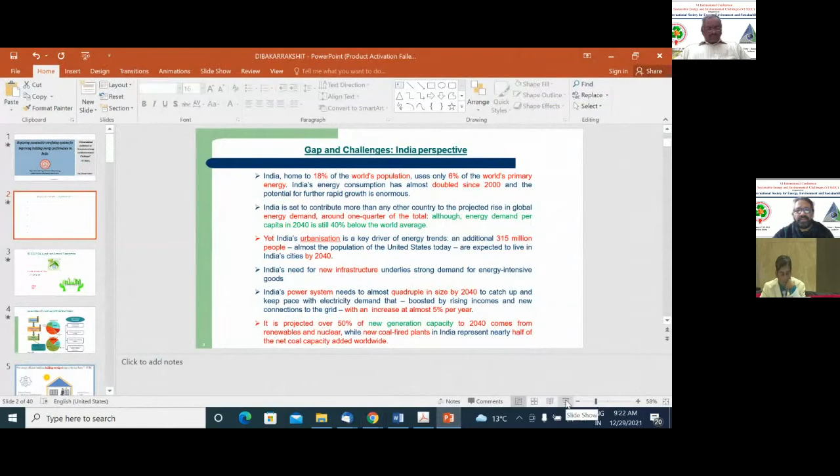Thank you, sir. So when we are speaking about India's contribution, it is said to contribute more than any other country to the projected rise in global energy demand if we are projecting it for 2040. But in terms of energy demand per capita, it is still 40% below the world's average. So you can see that there is a contrast.

And if we are speaking about how this energy consumption will be happening, the most important or the key driver in this is India's urbanization. You can see that there is a trend of people moving from the rural setup to urban areas, where we will be having more construction and more energy-intensive work taking place.

And when we are speaking about the way this urban population will be developing, by 2040 we will be having almost 300 million people living in the urban areas, which is equal to what the United States of America is having today. So definitely there is a need for new infrastructure underlying this huge energy-intensive requirement, this demand which we will be having.

India's power system will be quadrupling by 2040. I'm projecting it for, say, the next 20 years. And it can be seen that there is a huge requirement of new energy capacity, new generation capacity. And of course, renewables and nuclear will be taking an important part, but we can't eradicate the requirement of the new coal-fired plants, which will also be coming up.

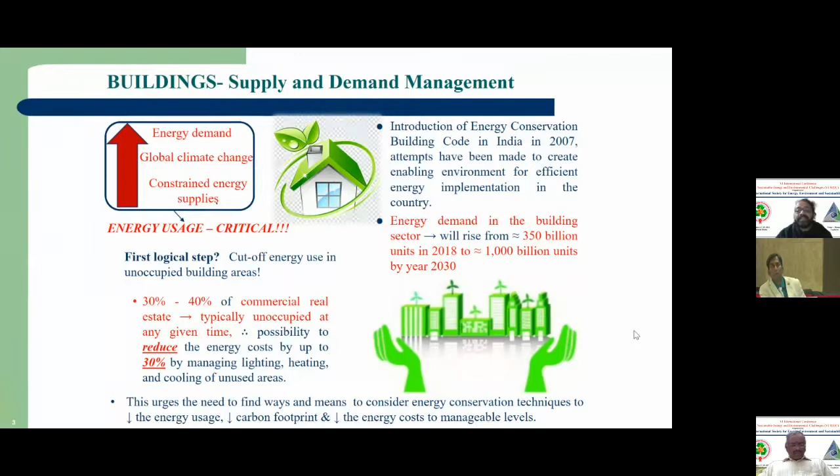So if we can have this type of demand side management, so that the energy can be judiciously utilized in those commercial buildings, then there will be a huge saving, or a huge evenness coming through the utilization of energy. And of course it will help us to reduce the carbon footprint, and it will make the energy requirement more practically used.

So now when we are speaking about energy, the highest form of energy which we generally speak about is electricity. When we are seeing the urbanization in India, the growth in the building sector which will be coming in the next 20 years, there is a huge requirement of energy, and especially this energy will be driven by the electricity requirement apart from any other forms of energy.

Now, we cool the building utilizing various active means, like the air conditioners we generally have, whether it is a centralized air conditioning system or a split or separate unit for each individual unit. But there are some passive features which we should promote and take into consideration, which have a huge impact on how we can save energy in these buildings.

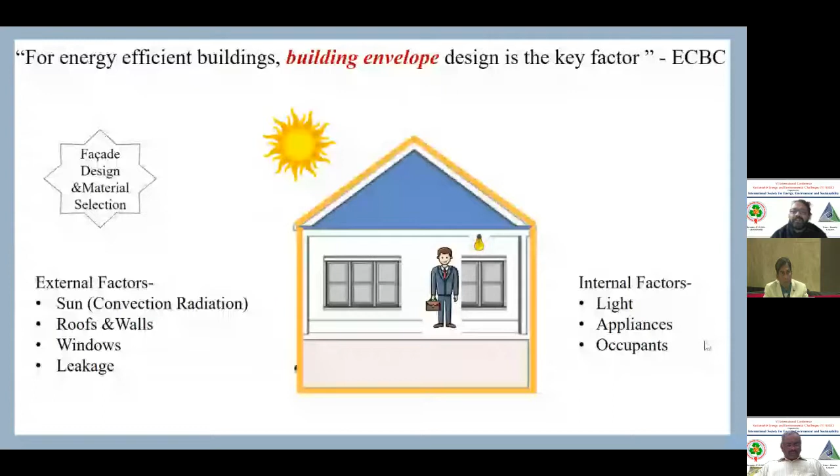Now, when we are speaking about the building facade, this slide pretty much summarizes what are the various portions through which the heat gets engrossed in that particular control volume. So maximum amount of heat gets engrossed through the roofing as well as through the walls. The facade is the main ingredient for increasing the heating or the temperature of that particular building through this roof and the wall. So if some way or the other we can optimize this design, we are directly having an impact on the electricity consumption of that particular control volume.

Now, here I will go a bit off, like I'm speaking about thermal comfort, but of course, when we are speaking about the indoor environmental quality, it is not only the thermal comfort, it is also the visual comfort, the type of air which we are breathing inside. This actually will be helping us to maintain less health risk, and at the same time it will be increasing our productivity. So if we are not maintaining it, of course it can be creating some sort of imbalance in the productivity of that particular area.

Now, why I'm speaking about this building facade in more detail can be understood from our vernacular structures. If we are going to our ancient time, we can see that there are various structures which are having a huge mass. This mass is actually the thermal inertia which is being created by the building facade or the roofs and the walls. But that time we were having the luxury to expand ourselves beyond any limit because space was not the concern. But when we are speaking about urbanization today, we are having the biggest constraint as the space.

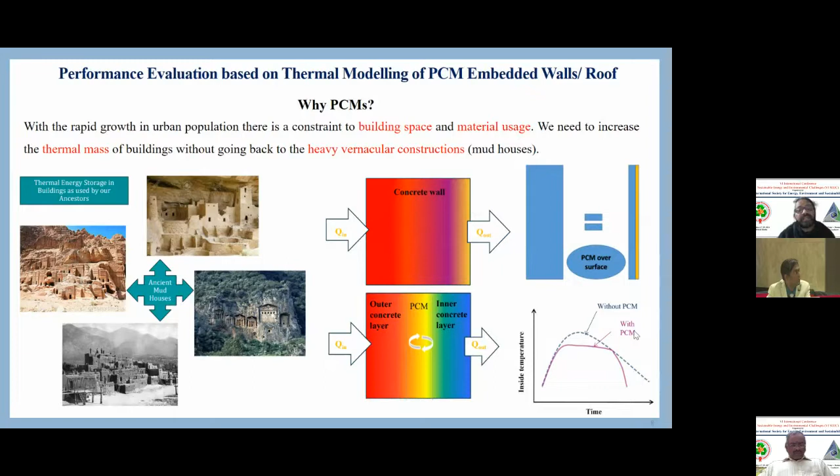Basically, phase change material has a very high energy density. Energy per unit volume of that particular material is very high, and at the same time it can have this storage of energy more or less at an isothermal condition, unlike that of the sensible heat storage capacity of any medium, which is not taking place in constant temperature conditions. So these are the beauty of utilizing this phase change material in the building envelopes.

And just to make you more aware of it, if you are going to some ancient buildings, say Humayun tomb or some of the forts, you will be seeing when you are going in peak summer, when outside temperature is suppose 40 degrees centigrade, at least you will be having 7 to 8 degrees centigrade lesser temperature in those buildings. And when you are going in peak winter, if outside temperature is say 10 or 12 degrees centigrade, at least you will be having 20 degrees centigrade inside those buildings. This is by virtue of the thermal inertia which that particular building system is having.

Now, as I was telling, people are moving from villages, they require houses which will be much more comfortable so that their productivity increases. And at the same time, if we are seeing holistically, the energy gets more or less evenly distributed as and when it is required. So that is the whole area for which we are trying to understand how this phase change material can help us in evaluating the performance of a particular building envelope which comprises the walls and the roofs. So we have taken the example of Pradhan Mantri Awas Yojana.

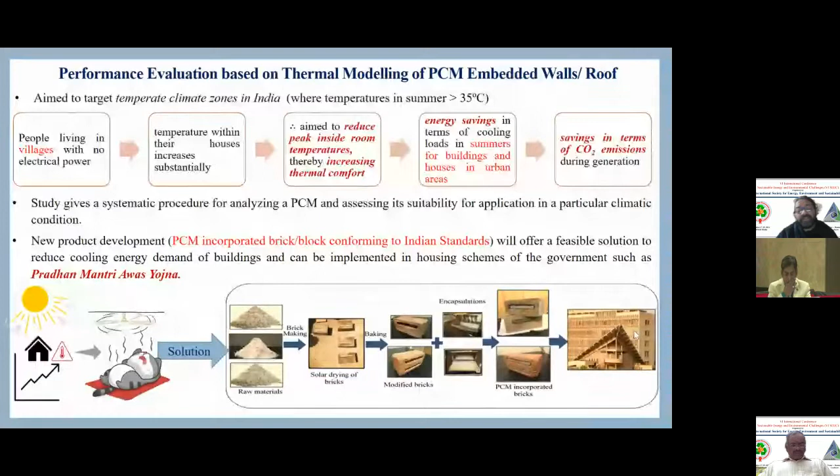Here I will speak about the type of phase change material which can be utilized, which can be encapsulated in those building blocks according to the climatic conditions of India. In India, basically, we have 6 climatic zones, out of which 5 are quite prominent. Taking the required phase change material according to the melting point, which will fit that particular climatic zone, is a very humongous task which you should always take care of, so that you don't choose the wrong phase change material for a particular situation.

And regarding the type of arrangement which we have taken in the bricks, this experiment is being conducted at Delhi. So we have taken the composite climatic zone of Delhi, and we have picked those phase change materials which have the melting point in accordance with the mean temperature of Delhi over a period of 365 days. Of course, we have designed it for summer conditions, because summers in Delhi become quite unbearable. So we have done 3 arrangements.

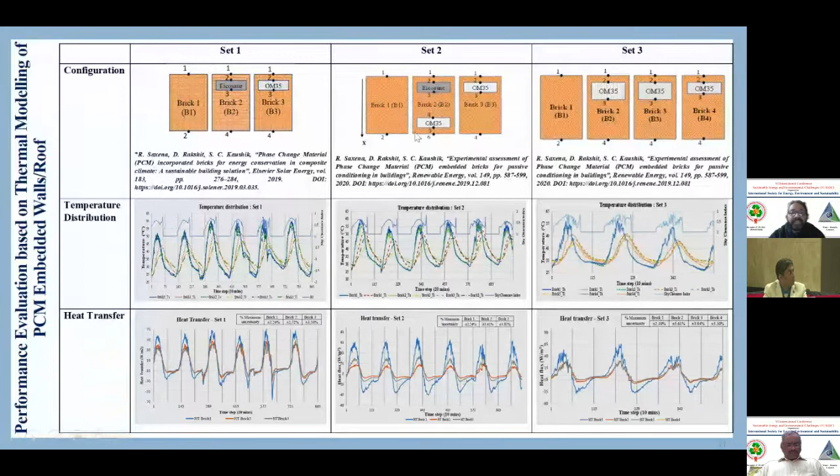Here you can see that one arrangement is with the brick placed inside the cassetted phase change material, another one has bricks with 2 different arrangements of cassetted material, and the third one was again the bricks with the cassetted material. And in those containers or cassettes, we have some sort of arrangement to increase the thermal diffusivity of that particular brick. Like we have introduced some fins or some sort of irregularities in those boxes, so that we can actually have more thermal diffusion through bricks.

So 3 different arrangements we studied, and then we tried to conclude how much temperature reduction we are finding inside the room in comparison to outside. The experiments were conducted in the month of May, and we found that the inside temperature got reduced by about 7 degrees centigrade for the best configuration, and there was a heat gain reduction of around 8 to 12%. And this actually helped us to understand how much energy can be saved when we have this type of facade, this type of passive features introduced inside the building.

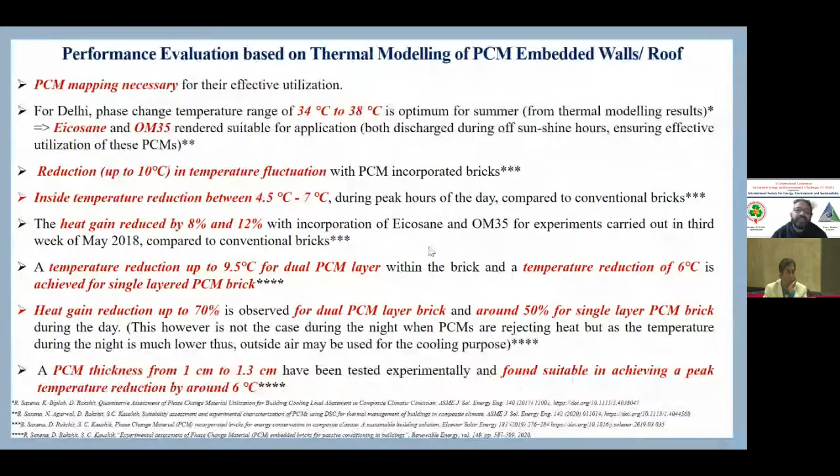Of course, we will not get in one stroke the 24 degrees centigrade thermal comfort temperature which we generally have as the norms of ASHRAE, but at least there will be some reduction in the temperature, which will not push you to that much electricity consumption where you have to cool the air from an outside temperature of 40 degrees to 25 degrees centigrade, maybe from say 35 degrees centigrade to 25-27 degrees centigrade. So there is a delta of energy savings which you can have by introducing this type of passive features in the building.

The next one is regarding a thermal retrofit. Again, with Pradhan Mantri Awas Yojana, we did generally.

Dr. Dibakar, yes, this is Himanshu. May I request you if you can maybe conclude in the next 2-3 minutes? Is it possible? Sure, I will do that. Thank you. Thank you.

So basically this building retrofit consists of the insulation as well as the phase change material utilized in the building walls. What we have seen generally when speaking about this type of retrofitting is that the location of the retrofit is known, or the thickness through which this heat transfer will take place is known. But a study making both the location and the thickness of this retrofit dynamic has not been done. So again, keeping in mind Pradhan Mantri Awas Yojana, we have done this type of retrofitting by varying the thickness of the retrofit, the insulation as well as the PCM, and at the same time the location.

For example, if you are doing this type of retrofit in Jaipur, it will be different from what we will have in Kargil or Siachen Glacier, because the temperatures or the climatic zones are different. So depending on that variable scenario, how we can do the retrofit was studied in this study, which we have done utilizing a genetic algorithm. I will not go into details of it.

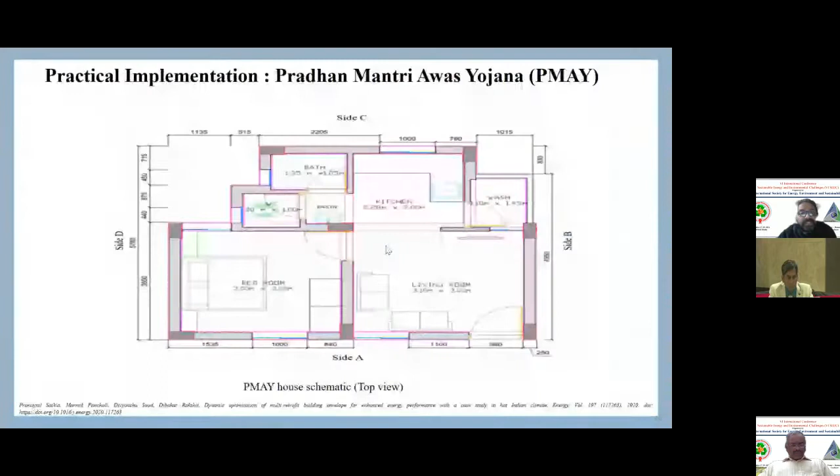I will just go to the final blueprint of Pradhan Mantri Awas Yojana. So you can see that the structural and orientation optimization through this thermal retrofitting, utilizing both the phase change material and the insulation in that particular control volume, can actually help us reduce the heat gain in that particular building to a considerable amount. And the electricity savings we can have per day is around 9 kilowatt hours.

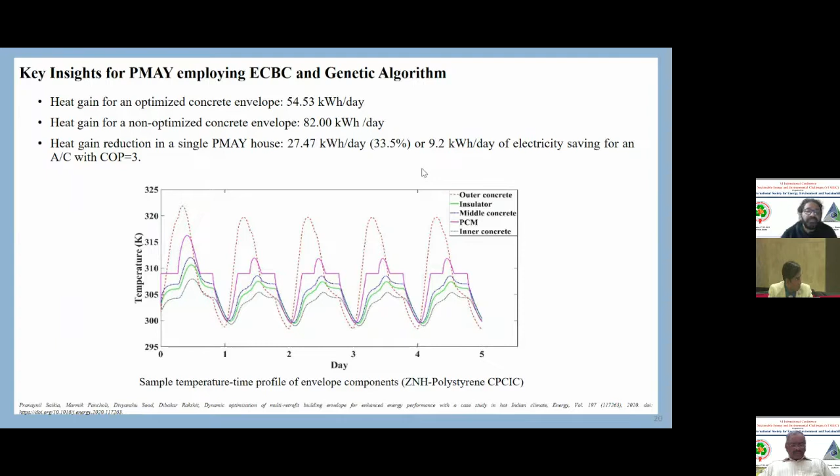So if it can be propagated in mass utilization through Pradhan Mantri Awas Yojana, we can save a huge amount of energy. So I think with this, I will be ending my talk, and if there are any questions, I will be happy to take them. Thank you.

Thank you very much, Dr. Dibakar, for an excellent talk. This is a very relevant topic for a country like India, where, as you rightly pointed out, a lot of the portions require a huge cooling load during the summers. As per the format, we will collect all the questions and take them together during the panel discussion round. Once again, I extend thanks to you.

Thank you. Now I request Professor Reddy. Dear sir, you may kindly share your screen. Earlier there were some technical difficulties. Now you may please go ahead and share, and we request you to kindly give your talk. Can you see my slides? We can hear you, sir, and I think we are seeing you. You have to click that button on the bottom. Yeah, now we can see it. See the slides? Yes, sir. We can see the first slide. If you can go in full slide mode. Thank you, sir. Okay, perfect. Thank you, sir.

Good morning to everyone, and thanks to Himanshu for giving me this opportunity. I'll give you a quick summary of various solar technologies for sustainability and carbon neutrality. By solar energy technologies I mean indigenously developed solar technologies for sustainability. How do we get sustainability through these technologies, how do we achieve carbon neutrality with them, and how technology development plays a major role in this.

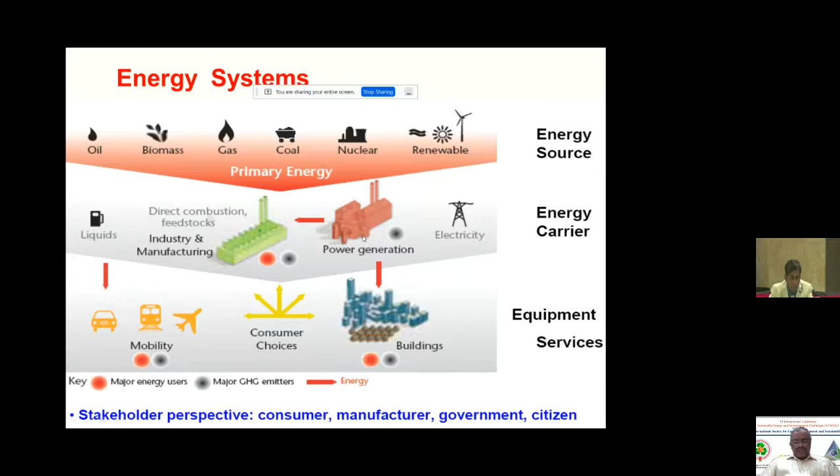I will quickly mention what sustainability is. Energy sustainability is important. We feel that we deserve luxurious systems, but obviously the system technology is very important, and the fuel used for these technologies is also important. We want good technologies, and the best technologies are luxury technologies which are imported, and we use them because we can afford it. Therefore we use fuel which is again imported. So importing the technology, importing the fuel, and polluting the Indian environment. That is a major problem as far as energy sustainability is concerned. So therefore it is very important.

Oil is one of the major energy sources in India for automobiles. In case there is some problem with oil, which we import from the Middle East and other places, we land up in an environment where there is no fuel. So energy sustainability is very important, because the Earth is surrounded by its atmosphere, and we are talking about global climate change. We are literally polluting by burning fossil fuels, and because of that, you have seen recent weather changes and so on.

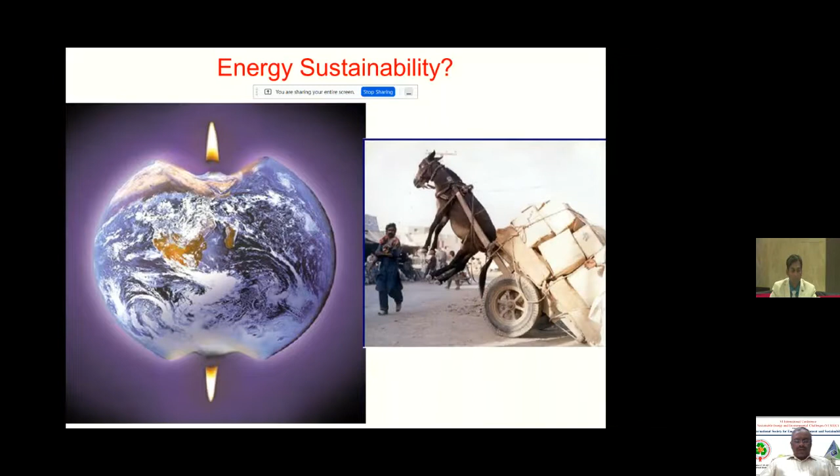So the Earth's atmosphere is overloaded with pollutants, and in turn it is getting imbalanced. Any overloaded system will be imbalanced this way. Therefore, energy sources need to be utilized, and if we don't develop our own technology, these resources will go extinct after some time.

So these are limited and they are stored. So if you try to take the resources, they will become extinct after some time. So therefore, it is very important to come up with a technology which is indigenous technology, so that the technology can keep these resources for the future generation, and we can take our own share. So therefore, technology plays a major role, especially in attaining energy sustainability.

So therefore, there's one earth we have to take care of, and energy sustainability is very important, and this includes various aspects of energy supply parameters, and energy efficiency, proper mix of energy sources, and renewable energy utilization are the major solutions which make the energy scenario sustainable.

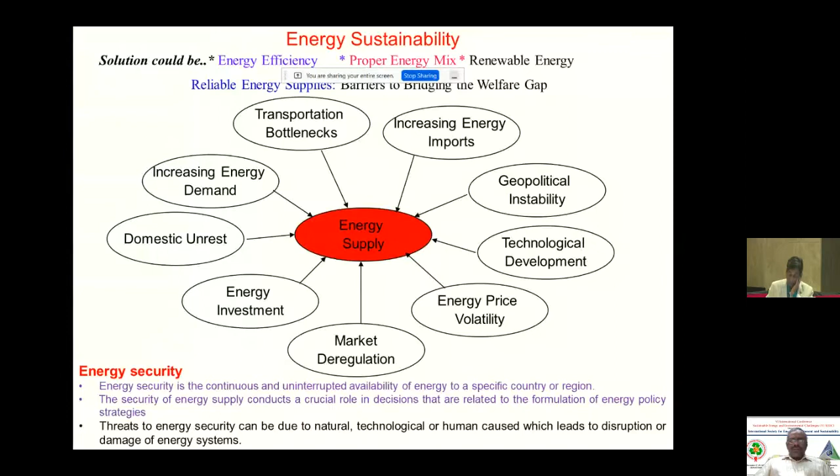So therefore, energy security is very important, and energy security means the continuous and uninterrupted availability of energy to a specific country or region. The security of energy supply plays a crucial role in decisions related to the formulation of energy policies and strategies. So therefore, any threat to energy security can be due to natural, technological, or human causes, which lead to disruption and damage of environment and energy systems, which is why I have mentioned that if we don't have a proper technology, we have a problem.

If you look at the energy services and sources from the day of industrialization, you know that industrialization started in the 1870s. Since then the transformation of energy has mainly been exploitation of fossil fuels. And if you look at fossil fuel exploitation, the hydrogen content in fuel plays a major role. As we increase the hydrogen content, it becomes more efficient, more sustainable, cleaner fuels. So gasoline has more hydrogen content than coal.

So therefore, eventually, if you have only hydrogen, that's what we are talking about, green hydrogen nowadays. Producing hydrogen from renewable energy sources like solar, wind, and other nuclear energy sources can give a solution for future energy scenarios. So there are several challenges to evolving resilient energy systems, key issues and challenges. I'm not going to read them here, I'm giving you the glimpses because we have very limited time.

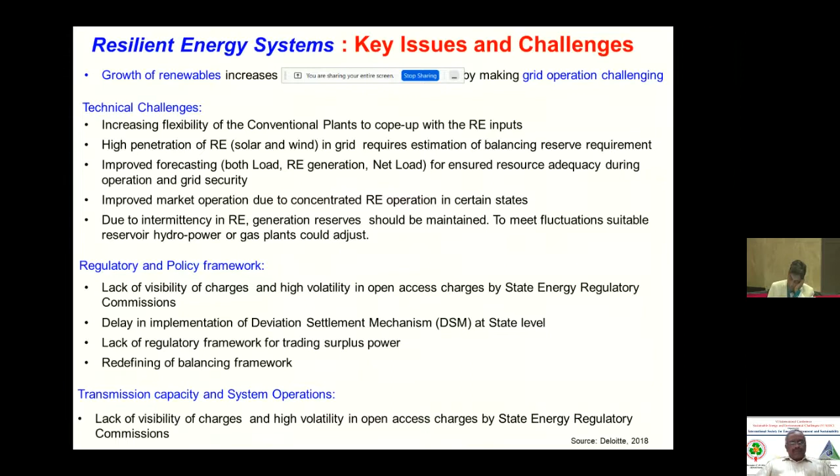There are several factors which play a role in resilient energy systems, like technical challenges, regulatory and policy frameworks, transmission capacity, and system operations of the energy systems. Towards a resilient energy system, it should be flexible, and demand side management is very important. As Dr. Divakar just mentioned, mainly cooling and heating loads in buildings and so on. So it's important to have a resilient energy system which can cater to these requirements.

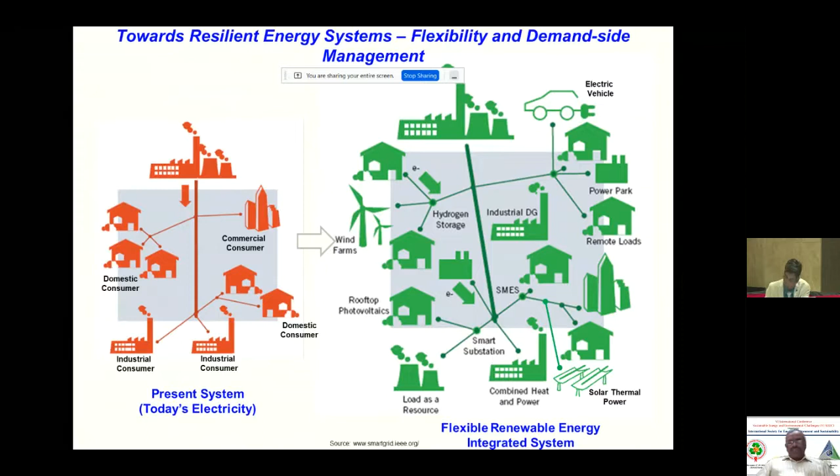If you look at the present system, it is this, but we may have to go like this, toward decentralized, flexible, renewable energy integrated systems, which may result in more sustainable and carbon neutral systems. As part of sustainability and carbon neutrality, there are various options where different types of intervention need to be emphasized on the demand side as well as the distribution side. I have listed here several system operation services from variable renewable energies, load management and flexible generation, transmission. Storage is another important factor, and a lot of research is being done on both thermal energy storage and electrical energy storage.

As part of that sustainability, I will quickly give you some of our technological interventions in renewable energy systems, mainly for sustainability and carbon neutrality. So we have developed

Sir, I think we have lost him. Hello. Dr. Tyagi? Hello. Am I audible? Yes, sir. This is Himanshu. Yeah, you are audible. We'll wait for a minute. I think earlier also there was some connectivity issue. He may join back. Sir, please try to keep your camera off, because as I already mentioned, even if there is a small connectivity issue, the speaker is being picked up.

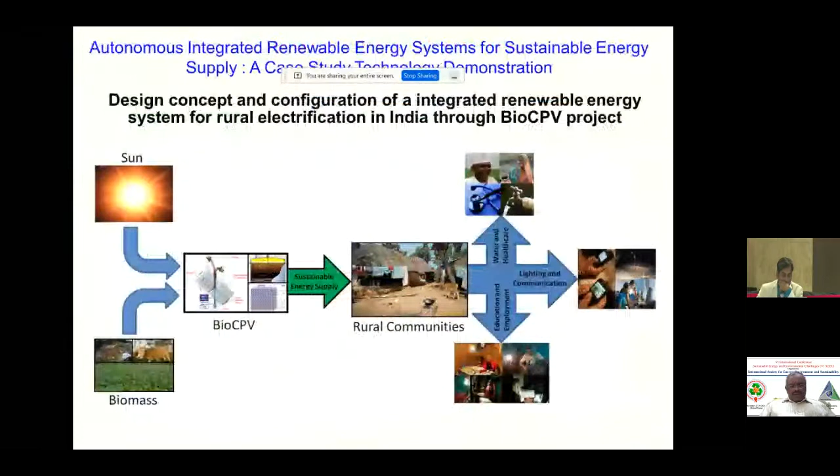Hello. Okay, can you hear me now? Oh, okay. Sorry. So I'll cut it now. Oh, sorry, I think there's some instability. Can you see now? We can hear you, and your video is working. You may have to click the share screen button on the bottom, because we are not able to see. Yeah, something is coming. Yes. So, sir, you may have to go back two or three slides, because we lost you about two minutes back. One more. Yeah, this one. Maybe next one also. Yeah, from here. Please go ahead. I'm sorry for the loss.

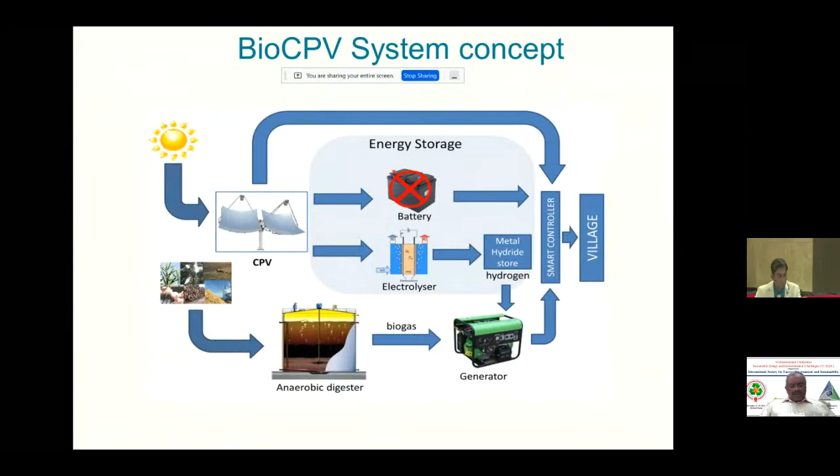So this BioCPV we installed in West Bengal in Shantiniketan, Rabindranath Tagore's place, and it is an integrated system with biomass and solar. This is a comprehensive system which takes care of not only electricity but also cooking gas and water. This is the system configuration; I'm not going in detail. Based on this system, we have built this and supplied it to this village. This village doesn't have any electricity. It's a remote village of about 60 houses, which are like huts. We have given both power and biogas, cooking gas plus water with this.

Can you hear me? Yes. Hello? Yes, yes.

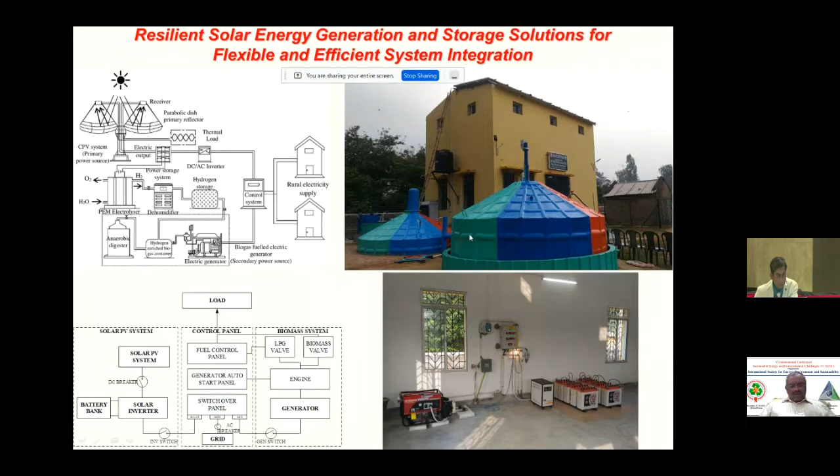Okay, thank you. So this system is integrated with biogas and solar, and with the battery, so that it's a 24-hour supply. Whenever the solar is there, the solar energy is used for supplying the power. When there is no solar, based on load management it switches to the biogas. When excess energy is produced, it is stored. Mainly during night time, it comes from the battery. So this is a comprehensive schematic of this particular system.

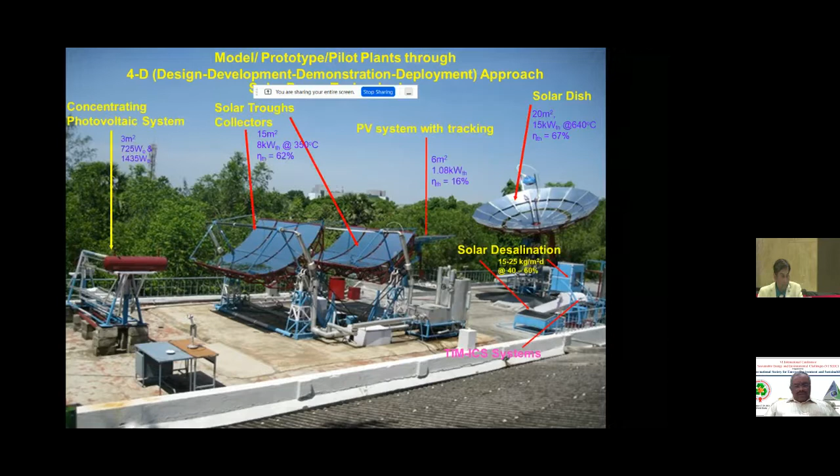As I mentioned, as part of sustainability and carbon neutrality, indigenous technology development plays an important role. Our approach is a 4D approach: design, development, demonstration, and deployment. Through 4E as a tool: energy, exergy, environment, and economic analysis. And through 4Ts, test tube to tabletop to technology development. Based on this, we have developed several technologies; I have listed 20 here. This is our lab at IIT Madras, with concentrating solar power technologies, mainly solar dish, trough and so on.

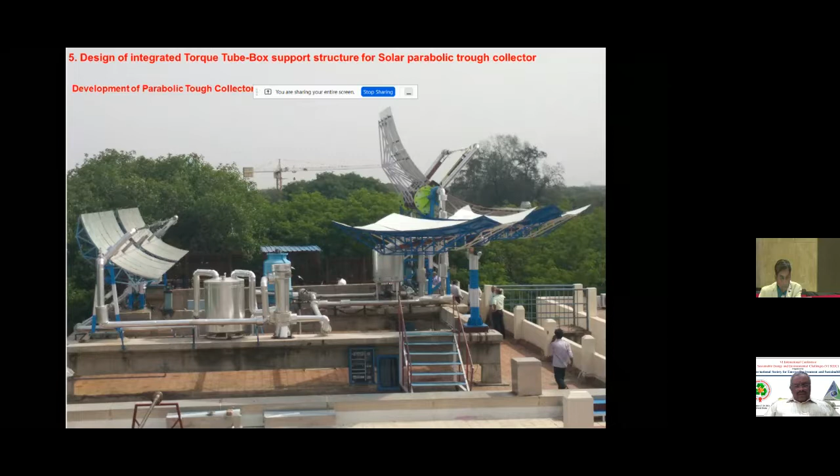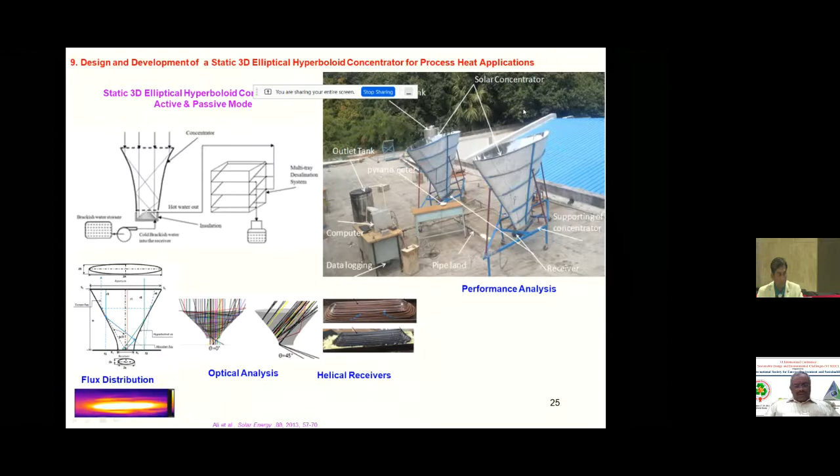Apart from that, there is a non-tracking system mainly for water desalination. This is a concentrating hyperboloid and elliptical structure which can cater to the needs of water generation, and it is non-tracking, because passive systems are an important thing.

So then, based on this, this is the water. As I mentioned, food, water, and energy are very important. So this is one such system, a multi-tray solar desalination system, the most efficient, with waste heat recovery and using latent heat. And I have given you that.

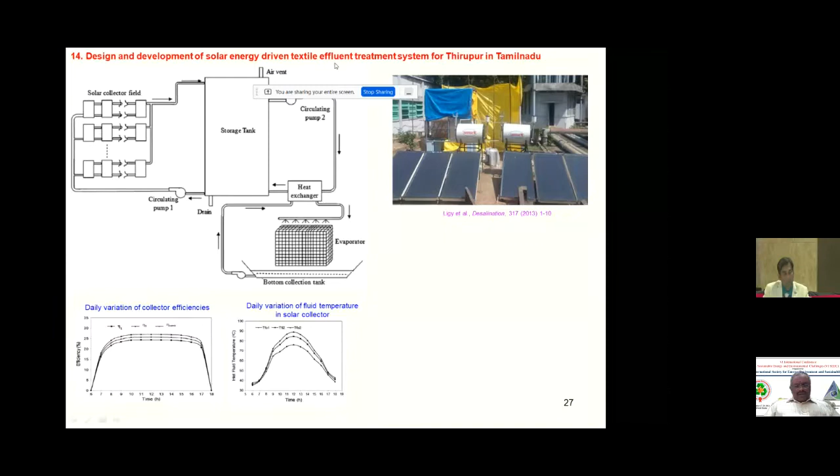And not only water treatment, but also wastewater treatment is important. You know that most of our Indian water bodies are polluted, and treating this water before sending it to the water bodies is important. So this is one system which takes care of the treatment of textile effluent, located in Thirupur in Tamil Nadu. This area is actually a textile hub for entire Asia, but now because of the stringent environmental norms, most of these textile industries are in trouble. So they wanted a solution which can treat the water.

Another important thing is what we have told you, net zero energy and carbon neutrality. We also have Swachh Bharat, which is important. Toilets are very important nowadays. So we have developed a solar zero waste discharge toilet. That means there is no liquid and no solid discharge, and we used both thermal and photovoltaic energy for driving the system. It's completely hermetically sealed, and the PV power is used to run the motors.

And we have a desalination system which treats the wastewater, and then there's a dryer. The solid material is dried and made into fertilizer or powder, which can be reused. And the treated water can also be reused. We installed this in one of our students' hostels in IIT Madras, Krishna hostel.

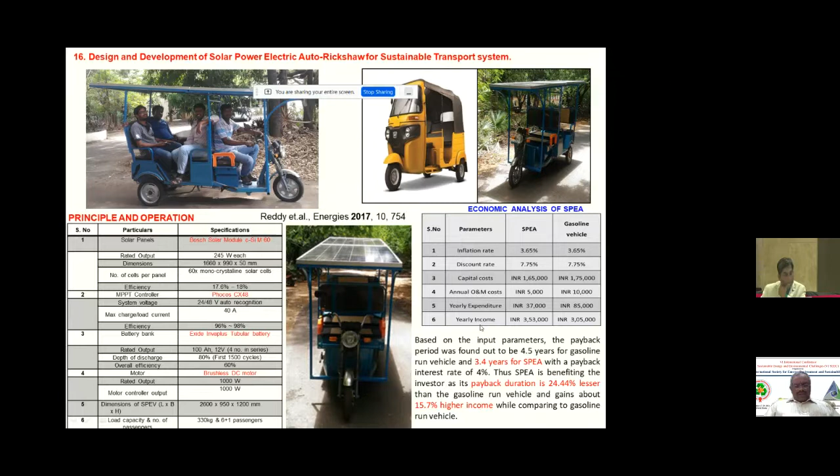Mobility is another important area to get carbon neutrality. As I showed in the first slide, the sustainability as far as the oil industries, like automobiles, are concerned. So one of my students developed this solar auto, and its cost competitiveness has also been studied, and it is proved that it is better from the emission as well as the cost point of view. These details are here, and it's also published. Those who are interested can look into it.

With this, I will conclude that the future energy system has to be resilient, more sustainable, and more carbon neutral. So generation and storage solutions for flexible and efficient system integration are very important. A future electrical energy system may consist of these components, which include distributed systems, electric vehicles, demand side management, advanced integration of infrastructure, data storage centers, and of course advanced grid and industrialized centralized generation. So it's a comprehensive thing.

Flexible, efficient renewable electricity generation and storage solutions are very important for system integration and sustainable energy supply. A new concept of integrated renewable energy system has been proposed for low cost and uninterrupted supply of electricity mainly in rural areas, which I mentioned earlier. Only with this will we be able to achieve carbon neutrality.

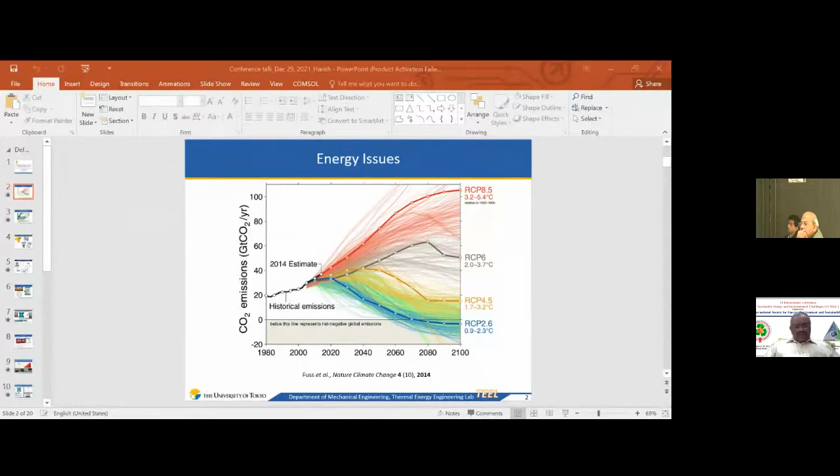Yeah, this thing never happens, because if you have shared your screen, then whatever you see, we also see over here usually. Can you see my slide? I'm just swapping around the slides. Can you see the change? I'm sharing the screen, right? No, this is a static image. We are getting the slide titled Energy Issues. On the bottom it is written slide 2. So you don't see any changes so far. You may want to minimize and open some other file or show desktop just for checking. Then please share your entire screen and then open your PPT.

Sorry, Dr. Dibakar, what are you saying? So what we are saying is please try to share your entire screen and then go to your PPT rather than sharing just your PPT tab. Okay. Yeah, now I think we can clearly see your complete screen. Perfect, now we can see the full screen, slide 3. Thanks, Dr. Dibakar. Sorry for the glitches. Please go ahead. So I didn't expect this glitch to happen.

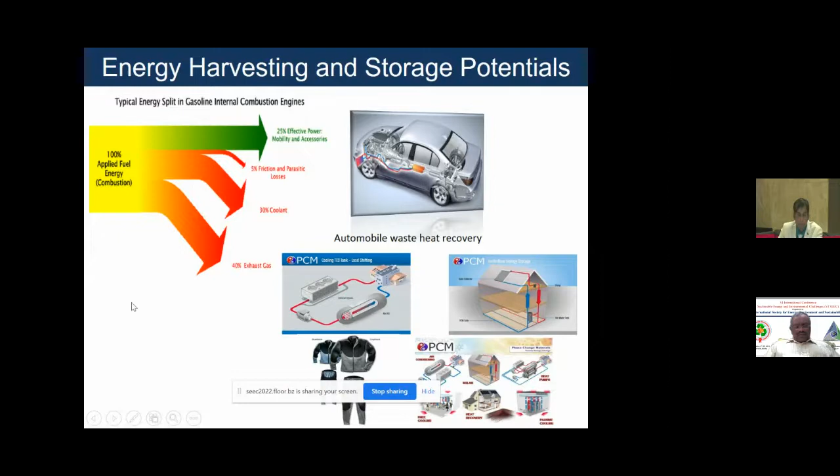So with exhaust gases, we are trying to see how smart we can be, what improvement we can have. One such technology is thermoelectric devices. Again, thermoelectric devices are a very old technology. If somebody asks a mechanical engineer, experimentalist, or electrical engineer how a thermocouple works, that's how thermoelectric devices work. A lot has been done. It was a hot topic for the last 15, 20 years, which will probably go on for another 10 years, in my opinion.

There are a lot of people trying to improve the thermoelectric materials as such. A huge amount of work and simulations have been done, and how this is going to affect things from the device perspective is the question I'm going to talk about. In fact, I'm taking a very particular subject, like what Dr. Dibakar talked about: building energy. Huge urbanization is happening, and people are migrating from rural to urban society. They want smart solutions, not hard solutions.

People are lazy. So we are trying to have IoT sensors which deal with the handling, and then you can get this data and do the processing using artificial intelligence. Data science technologies are available now, and we are trying to make things as simple as possible. These kinds of IoT sensors need self-powered devices.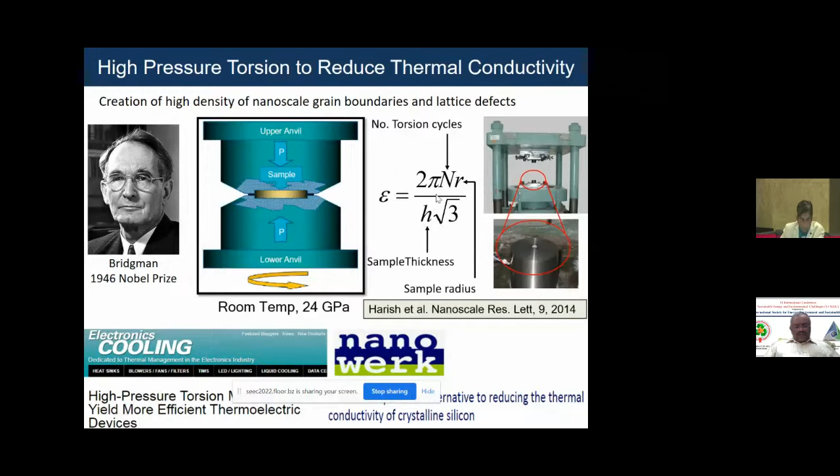But from the device perspective, you can have a very nice material which doesn't work. So the important perspective, from commercialization and from the device perspective, is to have a highly efficient device. So we thought: the hot side is beyond our control, and the thermoelectric materials, even commercially existing ones, are beyond our control, but we can play around with the ambient situation and make the cold side colder to make the device as efficient as possible.

So what is the trick? It's a very simple trick. Natural convection is definitely existing. Are we going to have condensation, dropwise condensation, or boiling? For sensors, where you don't have space to include anything, you have space limitations and no structural integrity, so you have to really cope with the limitations and rely on what is happening. So evaporation is the best methodology.

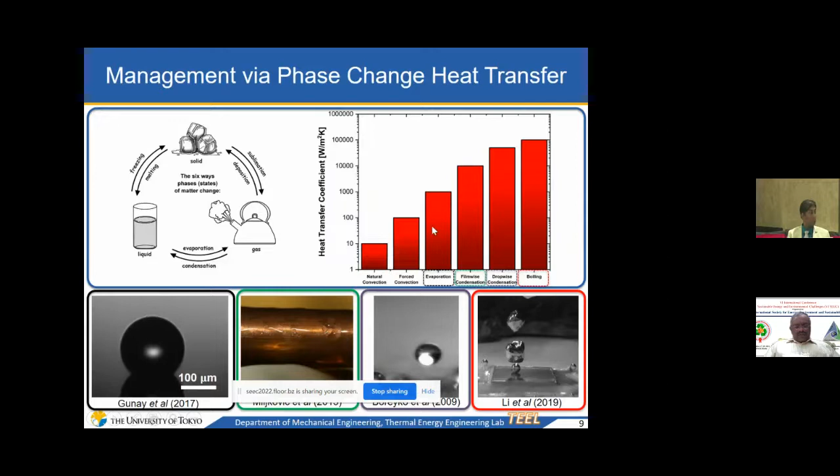So how are we going to evaporate water? Are you going to deposit water? No. We worked with metal organic frameworks, which are not a commercial material. It's a chemical synthesis process, with very high porosity and very high surface area, which can absorb water depending on the relative humidity condition. So we made use of that and tried different metal organic frameworks, one chromium based, the others aluminum and zirconium based.

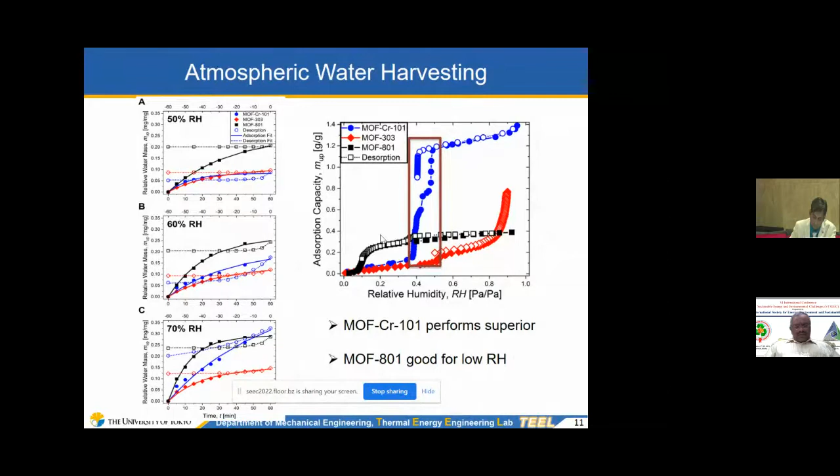For these cooling purposes, in the range of 40% to 60% humidity, you can see a material which can absorb water from the atmosphere at its own weight. So that was a great sign. So how are we going to do this? We just coat the metal organic framework on the device and see what happens. We tried different materials. One works for proper humidity ranges, one works for arid situations, and one works massively in high humidity situations.

So this is a very simple example. You have a hot side which you don't change and don't control, and a thermoelectric device which you don't control, and you only have the cold side of the device, which you properly control, and you just coat it with a porous copper substrate, because porous copper surfaces can also support it by capillary imbibition. We did a lot of experiments, a lot of trial and error with different MOFs. I'm not going to go into that in detail.

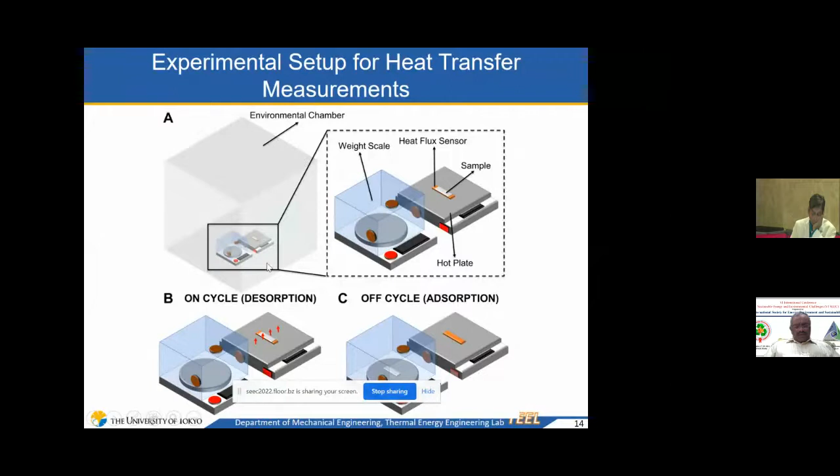Even the experimental procedures. Most of the experiments were done in the environmental chamber, which is a controlled atmosphere, but real-time experiments were also done. I can show you the results a bit. The idea is this: we allow the water to be absorbed inside the environmental chamber, then provide a heat pulse and see how it behaves, how the water is getting exhausted and what efficient cooling capacity you can deliver using the coating.

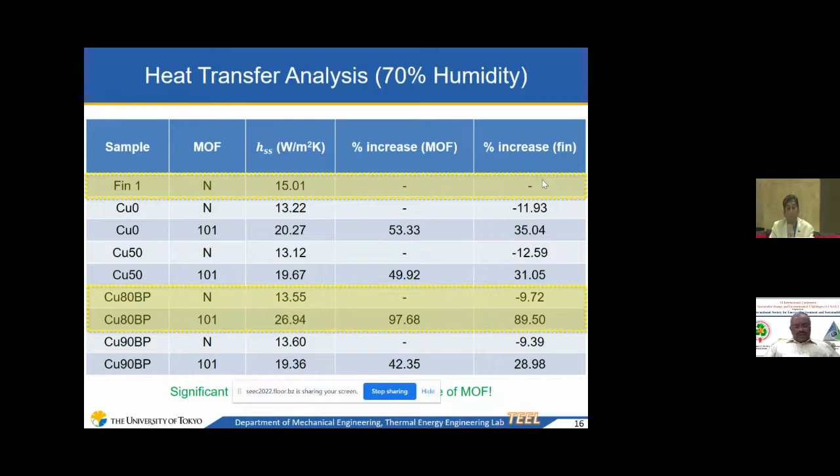What we learned is that this is far better than what a traditional PCM or traditional conventional devices can do. Just by having a coating, this is 80% porous copper, if you look at this slide, it can perform almost 90% better than a conventional heatsink available in a commercial thermoelectric device. So just a MOF coating gives 2 times better heat transfer performance, and this became another very interesting strategy. I'm hiding certain results because we have filed a patent about this.

So we used a chromium based material. As I said, MOF 303 is aluminum based and 801 is zirconium based. If you look at the mathematical analysis we did, coupled with the experiments, especially for MOF 303 and 801, a significant amount of heat transfer is happening because of radiation at room temperature, which is quite weird to understand.

And when we did the emissivity analysis, we learned that this is 100% emissive. In principle, MOF 303 and MOF 801 are white bodies, but they behave like a perfect black body. So this is a very suitable material for radiative cooling, and the preliminary experiments we did show that radiative cooling, like what Dr.

Dibakar said, it can actually cool just by having a coating. You can cool the substrate from the infrared radiation by 4 degrees Celsius in the daytime, up to 8 to 9 degrees Celsius at the night time. So that was a major experimental work.

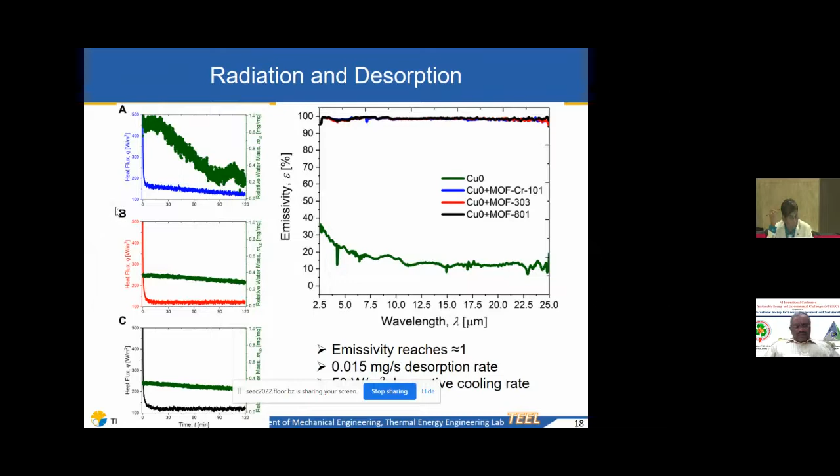I'm not showing that slide for particular reasons because we have filed a patent about this, but this is the emissivity data. So in principle, how these kinds of materials work from the thermoelectric device perspective: you can actually see a 6 times increase in the power output, and compared to the conventional existing heat sinks, you have 90% better performance.

I also tend to point out this experiment was done using a bismuth telluride device. This is a very conventional existing commercial device. So with new, better commercial thermoelectric devices coming up, and we are still progressing towards better technology, better design of MOFs, there is a huge scope: using TEG with MOF coatings will be a very nice solution for self-powered devices.

So I summarized this because I was only given 8 to 10 minutes. So MOF coated thermal fins were developed. It's a new technology, very scalable, commercially viable, and lightweight compared to phase change materials. So please think beyond phase change materials. We have very nice performance improvement, and I will be very happy to answer questions about this, because I haven't shared a lot of technical details. Okay.

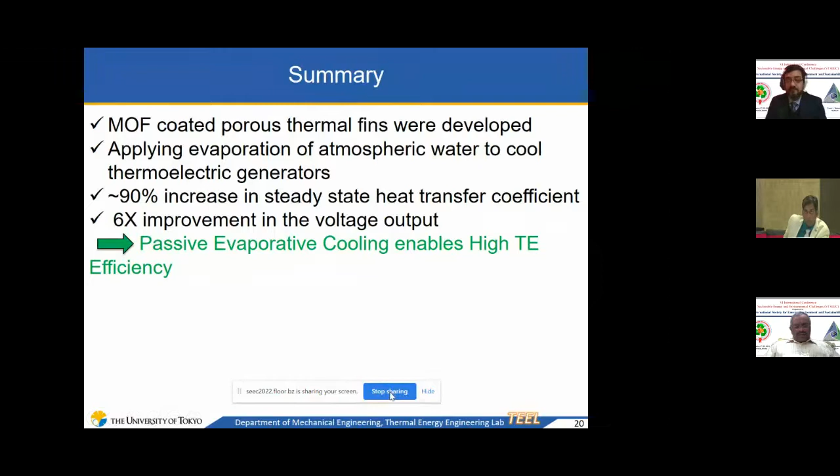Thank you very much, Dr. Harish, for the excellent talk. This is going to become very important because electronic devices are producing heat fluxes which are increasing every 2 years. So for nice dissipation of heat and protection of the electronic device, removal of heat sustainably is very important. Thank you very much. We will have question and answer during the panel discussion session.

Now we move on to the next talk, which will be delivered by Dr. Jagan. Dr. Jagan Gorale is Program Manager at Cargotec, a global leader in sustainable cargo handling solutions and services based in Finland. His working areas include emerging technologies ranging from sustainability, carbon neutral systems, automation, to data and digitalization through national and EU funding projects. Prior to this, he was with Parker Hannifin, a Fortune 250 company, where he chaired the Innovation Council and led R&D activities in hydraulic and industrial process applications.

In addition, he served the International Association of Innovation Professionals as an advisory board member during 2020-2021. He has working experience in diverse research and innovation projects in India and France. He received a PhD in Applied Fluid Mechanics and an MBA in Project Management. Thank you very much, Dr. Jagan, for joining us. Please go ahead with your talk.

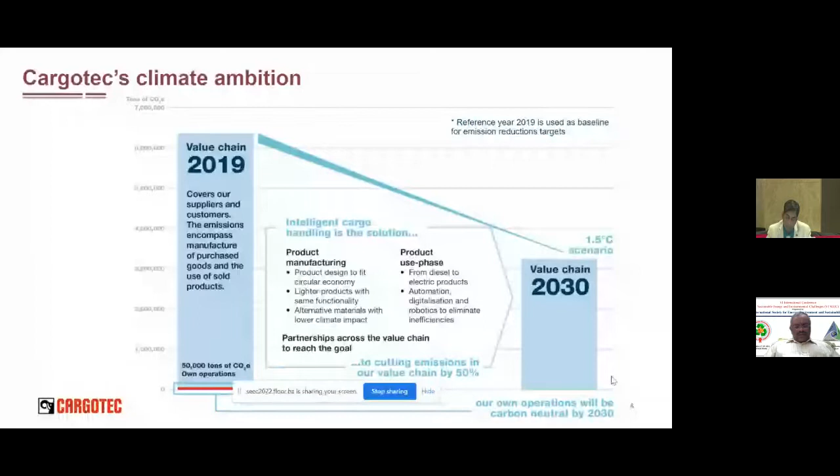We are somewhere in the middle as the product developer. So we want to decarbonize the entire supply chain from the source one to the last end user. So we have already developed those plans. Because of the time constraints, I already cut short my presentation by half.

But what are the best enablers as a company or as a society to accomplish these climate actions? This is my perception. Of course, this is subject to change or improvements. First thing is to make synergies between the climate actions and sustainable development, because this is very important. The rich countries or developed countries, they can develop some fancy stuff that may not work for the developing or underdeveloped countries. So we have to make synergies between the sustainable development and climate actions.

I don't know how many of you have heard about the coal plant closure in different countries, and then again immediately they had to reopen because they suffered the pain of energy demands by closing the coal plants. So it is not possible to close something immediately, but we have to take gradual steps.

And second is the collaboration and coordination. There are challenges between different countries, because they have their own priorities and their own sophistication in terms of money, time, energy, resources, etc., and technology development as well. But if you look at Asian context, recently there is this ASEAN or Asian collaboration between Philippines and Thailand. Their priorities are different.

For example, Philippines wants to include at least 30% or 35% of renewable energy in their operations by 2030, whereas Thailand is deciding to make all their vehicles carbon neutral by 2035. They defined their actions in different terms, but they have collaborated or cooperated with each other to meet these accomplishments. So these kind of collaboration and coordination activities are quite important.

My topic of presentation today is liquid alternative fuels from carbon neutral sources. If we look into the current scenario, there are ethanol and biodiesel which have been fairly established and researched fuels from carbon neutral sources or biomass, but there are other fuels like waste plastic fuel and hydroprocessed diesel which are not yet established and not much research has been conducted. So I'll be only discussing base things.

The basic gap which still exists in the field of biofuels is that we have understood the emission behavior, we have understood the combustion behavior, but we have yet to understand the onboard emission behavior of the fuels to actually evaluate how much contribution they will actually provide in cutting down the emissions in urban air quality.

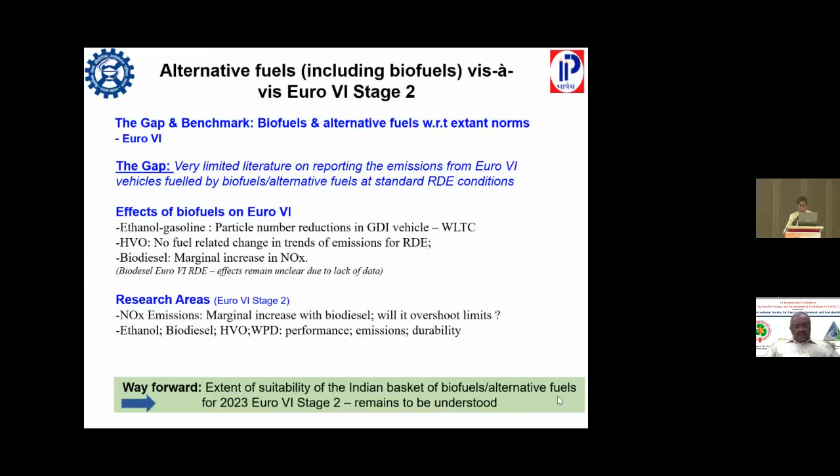So I will start with the green diesel. Green diesel is nothing but a hydrotreated vegetable oil distillate. Indian Institute of Petroleum already has integrated technology to produce jet biofuel from hydrotreating, and green diesel is a byproduct. It can be produced from any vegetable oil, edible or non-edible, or a mix of vegetable oils.

The beauty over biodiesel which it has is it is independent of vegetable oil composition. The composition of the output product remains the same, and the cetane number is very high, in the range of 75. It also has very high flash point, which in diesel we are struggling to get to 55 degrees C, and we still have in BIS 35 degrees C, and we debate it every time in BIS that for safety reasons the diesel's flash point temperature should be increased.

But we have not been able to do so because of constraints in refinery and economic reasons. But with this fuel, we can attain a higher temperature without much effort. That's the beauty of this fuel. Another very important factor is that this fuel is basically not having any oxygen. So the gumming problems are lower, and shelf life is much higher than what it is for biodiesel.

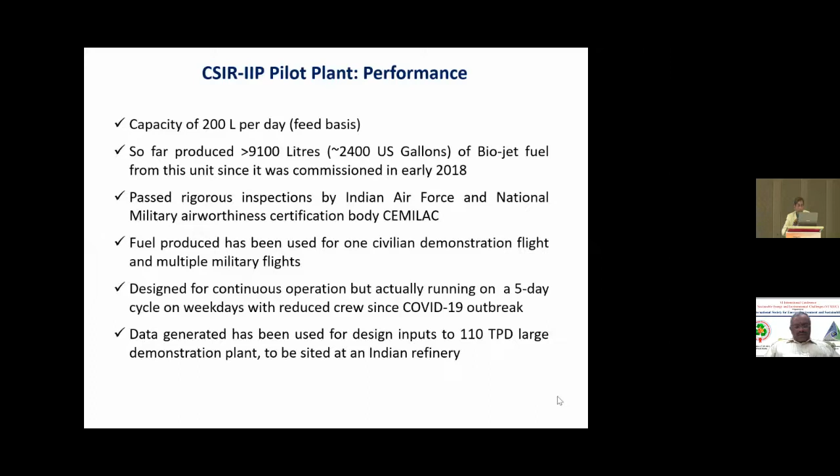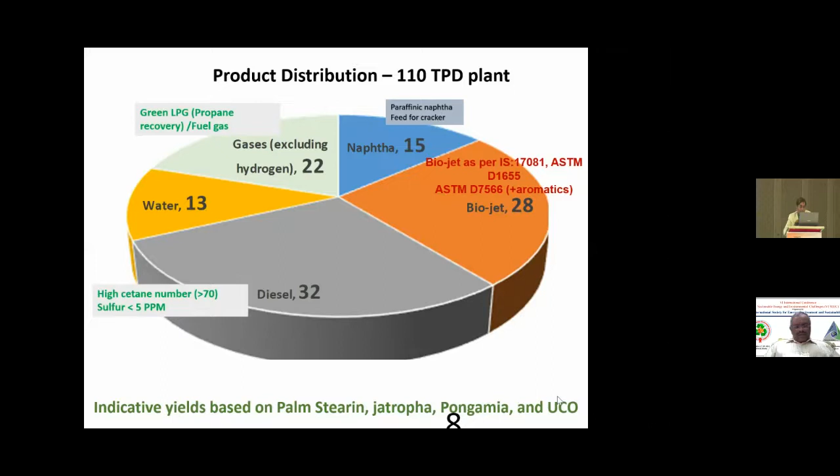Naphtha is typically 10 to 15 tons per day, biojet fuel is 25 to 30 TPD. Diesel right now is 38 to 40 TPD, but with the optimization of the conditions, as I said, it can be increased. Typically, if you see the product distribution, 22% of it is gases excluding hydrogen, 15% is naphtha, biojet is 28%, diesel 32%, and water 13%. And these are typical photographs of the plant available in the IIP.

Dr. Sinha has established this plant. The beauty of this plant is that the original process was actually conducted in multiple steps, but the IIP process is a single step process where we go from hydrodeoxygenation in a single reactor, followed by hydroisomerization, hydrocracking and hydrogenation as it is done in a hydrocracker for petroleum fuels.

Now, as I said, we did some engine tests also. We used a Tata Cummins engine rated for 134 kilowatt at 2500 RPM, with peak torque at 1540 RPM. And as you can see, the typical parameters like fuel consumption, hydrocarbons, CO, and NOx emissions all reduce. NOx emissions reduce as compared to diesel here for two primary reasons. One is the higher cetane number, which cuts down on ignition delay, which means lower flame temperatures and in turn lower NOx emissions. Similarly, the adiabatic temperature is also controlled, so the temperature and the NOx are down.

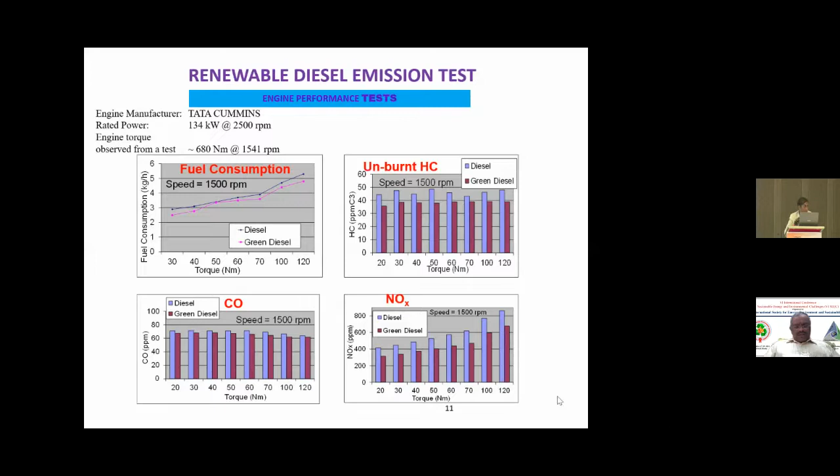But on the sad side, the particulate emission goes up, which I'm not showing, because the feedstock we had was having very high sulfur of more than 250 ppm as compared to the 10 ppm diesel, and it may be optimized. If we have comparable sulfur, that result needs to be seen yet. So this is the story. We are right now running a Tiago test car on this diesel for mileage buildup, and we will see how it performs in the production vehicle, and get back with the results probably in the next conference.

Now, another drop-in fuel is gasoline and diesel from waste plastics, where the process is based on conversion of polyolefin waste comprising plastic bags and packaging into LPG, gasoline, and diesel-like fuels. We have also done some evaluation in our lab, and results are quite promising. As a matter of fact, India generates 62 million tons of waste each year. About 43 million tons, 70% of it, is collected, and the rest is uncollected.

MSW generation per capita in India is 0.17 kg per person per day in small towns, and 0.62 kg per person in cities. Uttarakhand itself generates 900 to 1500 metric tons of MSW per day. A large portion of it remains unrecycled and creates so many troubles. Waste management is indeed a huge challenge for municipal corporations.

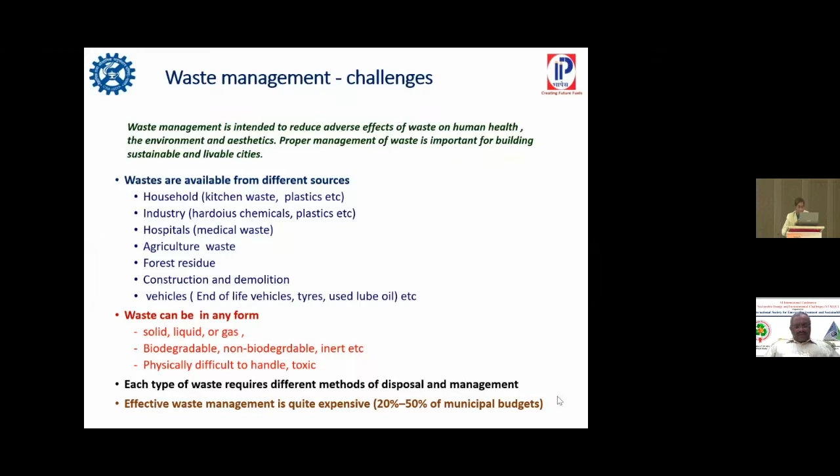The waste comes from multiple sources like household, industry, hospitals, agriculture, forest residue, construction and demolition, and waste can be in any form: solid, liquid, biodegradable, toxic, and each type of waste requires a distinct type of disposal management. But if you look into the typical composition of waste, typically 8 to 10% of it is waste plastic, which is not biodegradable and poses a serious threat to the environment and marine environment. So, I have some data here.

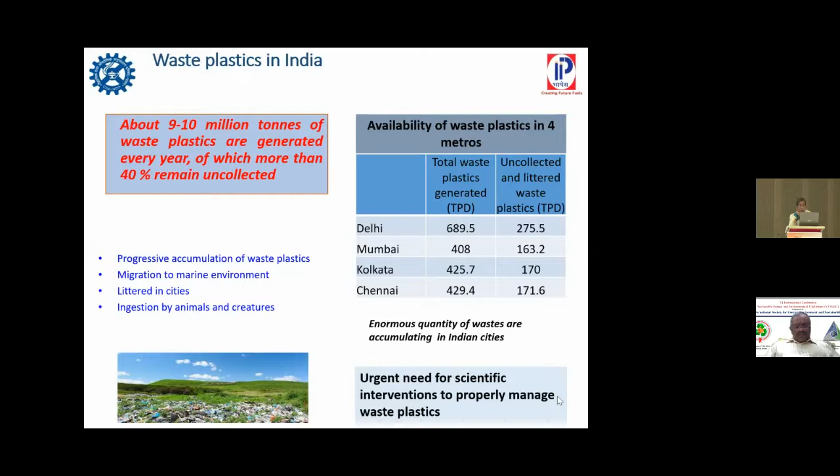Yeah, I have compiled some data here for 4 metro cities. You can see the uncollected and litter waste is quite high in terms of waste plastics, and there is a serious need to actually take care of it.

Waste plastics typically are produced by pre-consumer waste like industry and process industry, post-consumer waste like MSW, agriculture waste, construction and demolition waste, electric and electronic equipments, end-of-life vehicles.

Where does it go right now? Okay. Most of it is going into landfills, and worldwide it is 40 to 50% going into landfills. Incineration has been a process to get rid of it, but it releases a lot of toxic gases and is not very helpful to marine life. So most of it remains littered here and there, making cities dirty, making environment polluted, and waterways choked.

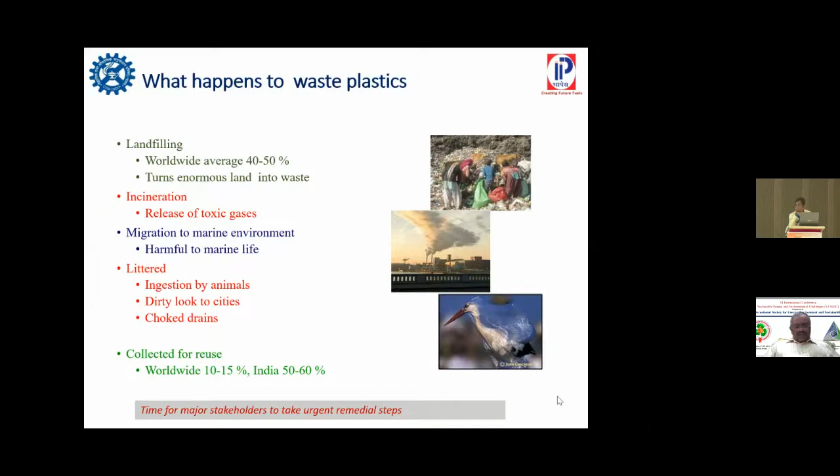The collection for reuse is only 10 to 15% worldwide. In India, luckily, we have a much higher percentage of collection, which is standing from 50 to 60%.

Now, why plastics? Plastics have been a part of our life because they have large molecules with high tensile strength and mechanical strength, lightweight, cheap, and versatile, and easily produced from petrochemicals and petroleum industry. And they are resistant to moisture also, biological agents also. So somehow they have captured a big portion of our life, and it's very difficult to get rid of them in our day.

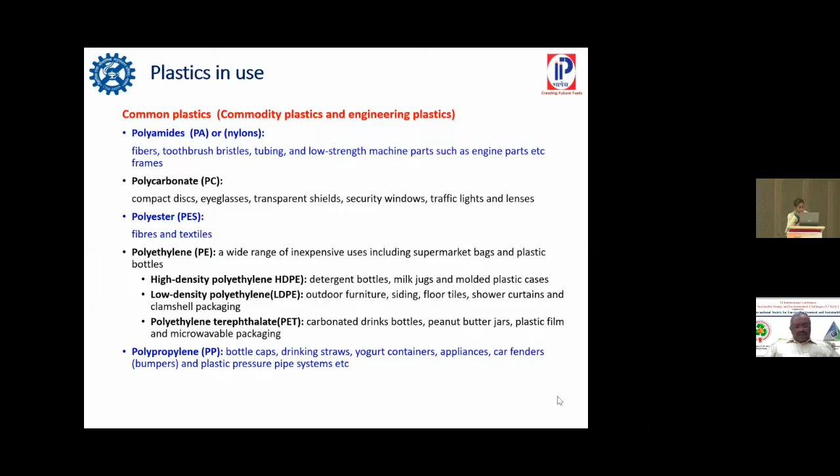If you look into the common plastics which we use, PAs, polycarbonates, polyesters, polythenes, high density, low density, or PE type, or polypropylenes. Polystyrene, high-impact polystyrene, polyvinyl chloride, acrylonitrile butadiene, and so on. Here I have summed up what type of plastic is used in what type of materials.

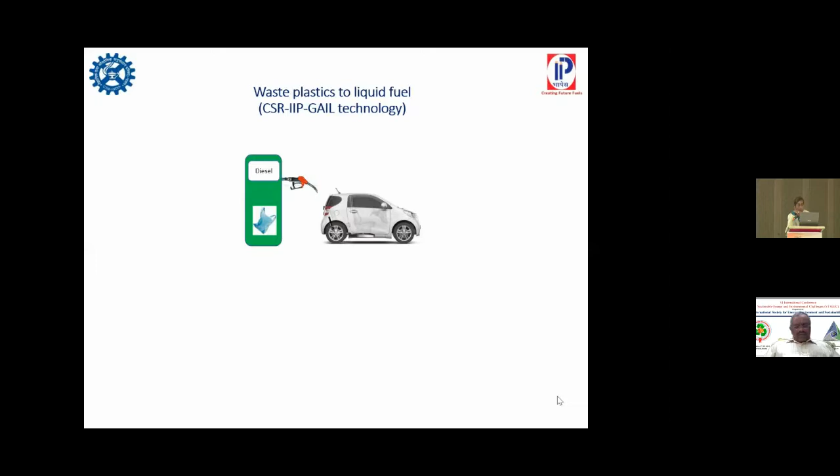So IIP, in collaboration with GAIL, actually developed a technology to convert these waste plastics into fuels. What is the feedstock for the plant? Plastics made of PE and PP, like waste carrying bags, virgin and recycled milk pouches, yogurt cups, fruit wrappers, stuffing, cheese, etc. These can be converted into fuels easily in that plant.

Product can be diesel-like fuel, or gasoline-like fuel, or aromatics like benzene, toluene used in chemical industry. The same plant can produce all three depending on what type of catalyst you use and what type of temperature and pressure conditions you use.

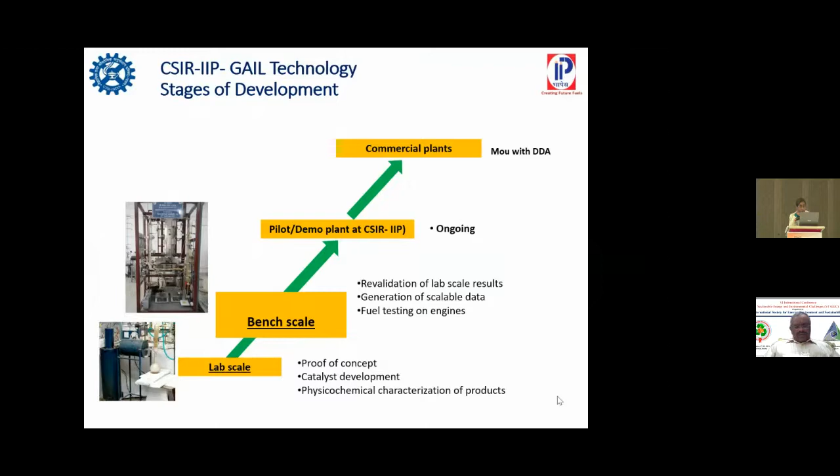So, if you look into a typical development, we have done it in lab scale, followed by bench scale, followed by pilot scale, and now we are trying to put a commercial plant in Delhi to run in collaboration with DDA. This is a typical plant which we had at IIP, which was a 1 ton per day unit, put in August 2019. The technology is supposed to be ready for demonstration by the middle of next year.

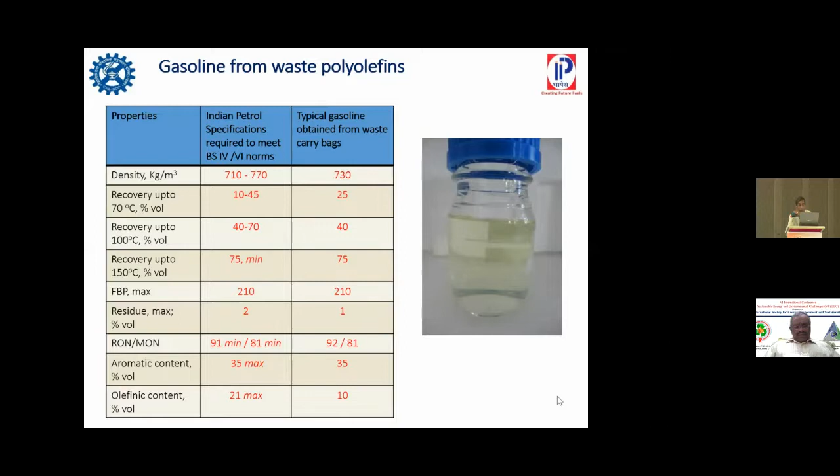Hello, Dr. Mrityunjay. May I request you to kindly...

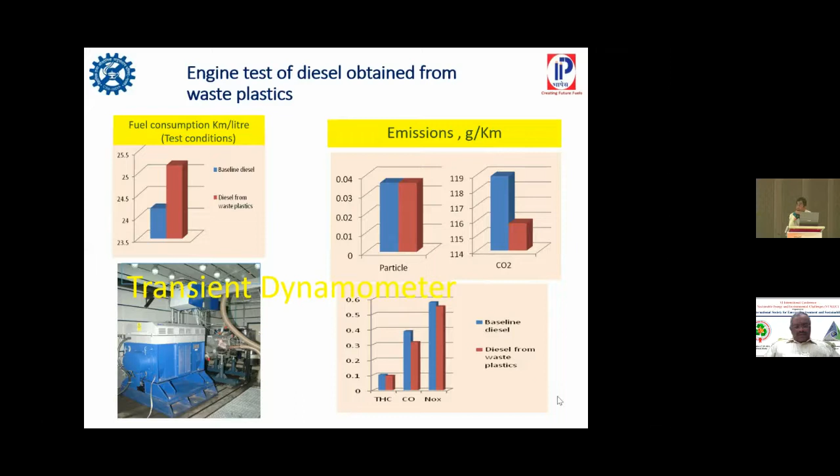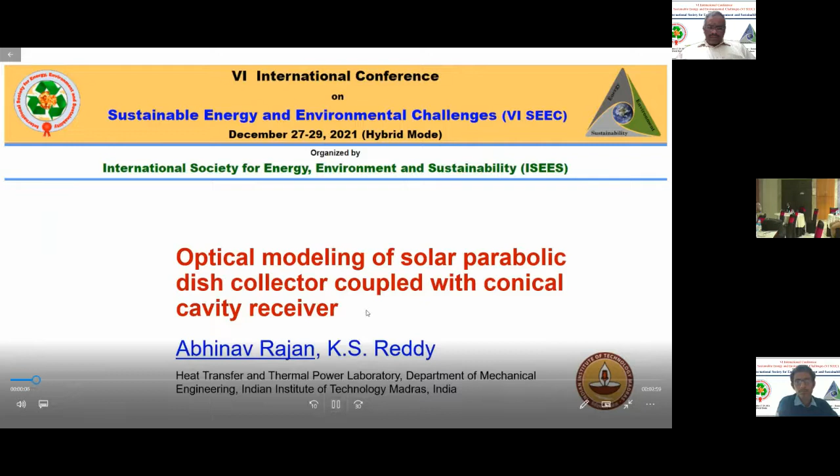Good morning to all. My name is Abhinav Rajan. I am a research scholar at IIT Madras. I am here to present my work, optical modeling of a solar parabolic dish collector coupled with a conical cavity receiver. First, I will start with the background and motivation. As we know, solar energy is eco-friendly and available in plenty throughout the year, so we can use solar energy to meet our energy requirement.

Here we have considered a parabolic dish collector, which is used to reflect incoming radiation to a receiver. We can see the details of the receiver here. The receiver is conical in shape. This is the inner and this is the side wall.

In order to optimize the performance, the selection of receiver is very crucial. It should capture more incoming radiation, so it should be optically optimized. In the present study, we are optimizing various parameters such as aperture opening, surface absorptivity, and location of the receiver to achieve the optimum performance. Now I will talk about the method involved in the study.

Here we have a 40-square-meter parabolic dish collector with a 45-degree rim angle and a focal length of 4.3 meters. The reflectivity of the parabolic dish collector is set to 92%. This is the receiver. The inner wall and side wall of the receiver are considered as the absorbing surface, and the absorptivity of this surface varies from 25% to 95%.

The Monte Carlo ray tracing method is used in ASAP software. The ASAP software is an optical tool. The number of rays coming from the source is 0.1 million, and further increase in rays has a marginal effect, and the model is validated with experimental work and holds good agreement. Now I will talk about results and discussion.

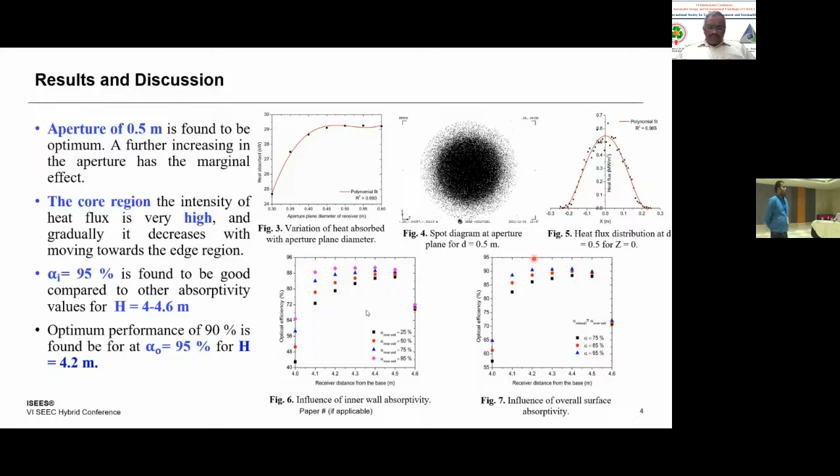Now the conclusion. Based on optical modeling, the following conclusions can be drawn. The optimum value of aperture is found to be 0.5 meter, and the heat flux distribution has a good fit with R-squared of 0.965. Further, inner wall absorptivity of 95% performed well compared to other values, and also overall absorptivity of 95% performs well, providing 90% optical efficiency at a height of 4.2 meters. Thank you for your attention.

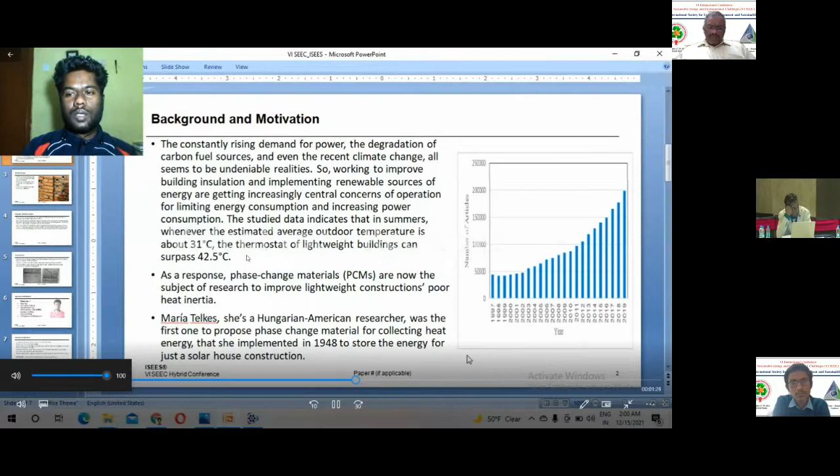You can see a graph of number of articles against year, from 1997 to 2019. The graph shows an ever-increasing trend of the number of published articles about PCMs used in buildings. So it can be predicted that in the near future it will grow even more and the demand for PCMs is going to rise. Methodology: PCMs can be directly mixed with the cement concrete with various binder materials.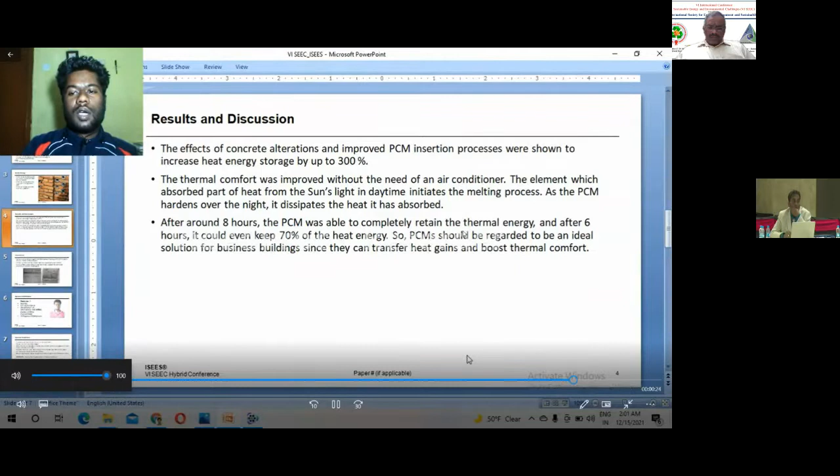The element which absorbs part of the heat from the sun's light in daytime initiates the melting process. As the PCM hardens over the night, it dissipates the heat it has absorbed. After around 8 hours, the PCM was able to completely retain the heat or thermal energy, and after 6 hours, it could even keep 70% of heat energy.

Conclusion: climate conditions must be considered while evaluating the performance of PCMs. The optimal phase change temperature of PCM should be in the range of 18 to 35 degrees Celsius in order to achieve thermal comfort parameters. Thank you. My presentation for today is now over.

Thank you, Ravi. Are there any questions? Is Ravi present, either physically or online? Yes, sir. Hello, Ravi. Am I audible? Yes, we can hear you. So let us see if there are some questions. Panel members, would somebody like to ask a question? Mr. Tyagi, can I ask one question? Please, Devakar, go ahead. Thank you. Good morning, Mr. Raviraj. Am I audible? Yes, sir, you are clearly audible to me.

Okay, thank you. So you are speaking about utilization of PCM in buildings to save energy, right? Is there any important feature which we should keep in mind when we are going for retrofitting a PCM? We know that compared to sensible, latent heat has good qualities. But within the phase change material, is there any important feature which we should keep in mind?

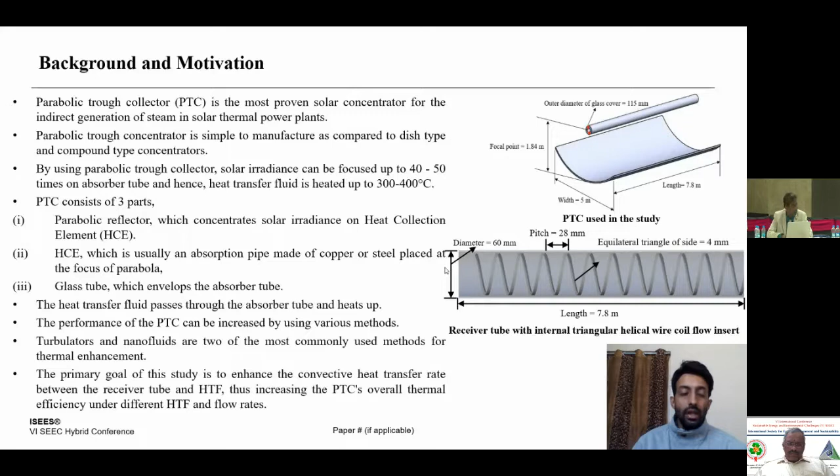And in order to increase the performance of a parabolic trough collector, we have two main methods in the literature. One is using turbulators, and second one is nanofluids, in which the nanoparticles are added into the fluids. The primary goal of this study is to enhance the convective heat transfer rate between the absorber tube and the heat transfer fluid. Thus, we can increase the overall efficiency of a parabolic trough collector.

And after that, we use gaseous fluids. One is air, second we use carbon dioxide, and last we use helium. And we find out the exergy efficiency and the thermal efficiency for all the working fluids, and at the end we compare all 7 working fluids, their thermal efficiency and exergy efficiency.

So at the end we conclude that we have studied a broad range of temperature which varies from 300 to 1300 Kelvin for the 7 different fluids. And from the sensitivity analysis, we find that for the low temperature range, pressurized water is suitable, and for the higher temperature range, we have liquid sodium, which works up to 1100 Kelvin, and beyond that, carbon dioxide and helium are suitable.

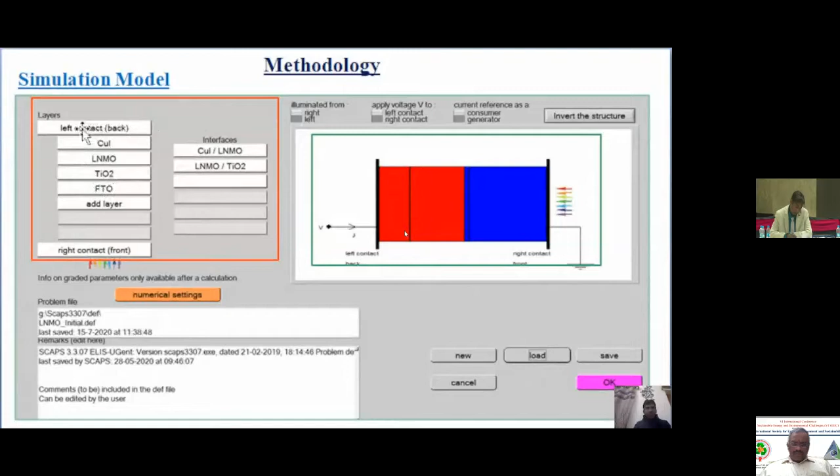So this is the virtually designed solar cell in SCAPS simulation software. Here we use TiO2 as electron transport layer and CuI as a hole transport layer. Initially, we performed the DFT study and optimized the band gap of absorber and received optimized band gap of 1.11 electron volt. Further, we optimized the different parameters, defect density, doping concentration, and thickness of the absorbing layer, and observed the performance of the device. So we can see once the defect density and doping concentration was less, the recombination rate was also less. But once the doping concentration and defect density increases, the recombination rate is high. That affects the performance of the device.

In the similar condition, once the thickness of the absorber was less, the power conversion efficiency was less. But once the thickness of absorber was optimized, the device gave improved power conversion efficiency. We have also observed the quantum efficiency wavelength curve according to the variation of thickness of the absorber. Further, we performed the simulation study with different electron transport layers, and we found that TiO2 and C60 can be a good electron transport layer with LNMO based devices. In the next study, we varied the work function of front electrode material, and we found that once the work function was less than 4 electron volt, no electrical barrier formation takes place. But once the work function increases from 4 electron volt to 4.2 electron volt, the electrical barrier formation takes place, and that affects the device performance.

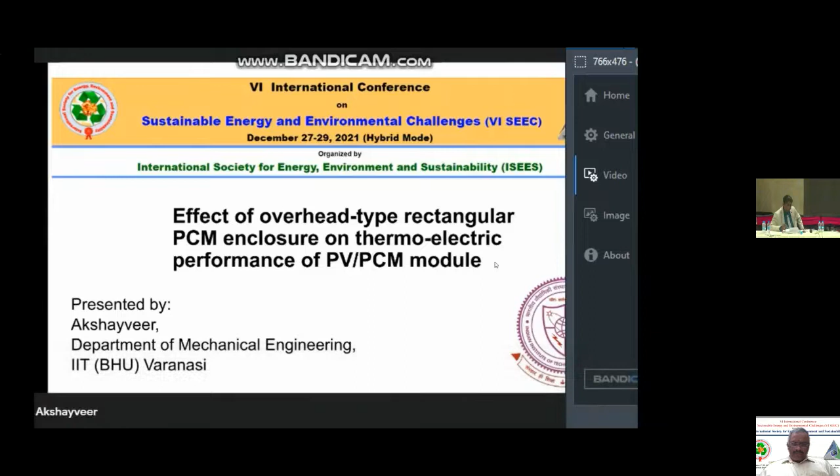Effect of overhead type rectangular enclosure on thermoelectric performance of PV/PCM module. I am from Department of Mechanical Engineering, IIT BHU Varanasi, and I am here to present my topic. We see that pollution is driving more deaths compared to COVID-19, and it is a very serious issue causing air pollution, global warming, sudden climate changes due to exponential growth in population.

So we need to move towards renewable energy sources, and in particular towards photovoltaic panels because they produce clean energy. But due to temperature rise, their performance deteriorates. So we use PCM and a PVPCM system to generate electricity, which can produce cleaner energy at a higher performance rate to meet the global energy demand.

But even conventional PV systems have a problem of temperature increase in later stages of melting, hence modification of encapsulation is required. We have modified the design of encapsulation to overhead type, and these are the boundary conditions given to the system. There is solar radiation, radiative and convective loss, heat is being stored in the PCM, and all other boundaries are insulated.

These are the boundary conditions, and these are the governing equations. Mass, momentum, and energy are conserved for the PCM enclosure, and energy is conserved for the PV and glass layers. And this is how we calculate the power output and efficiency of the PV panel. Now we come to the discussions.

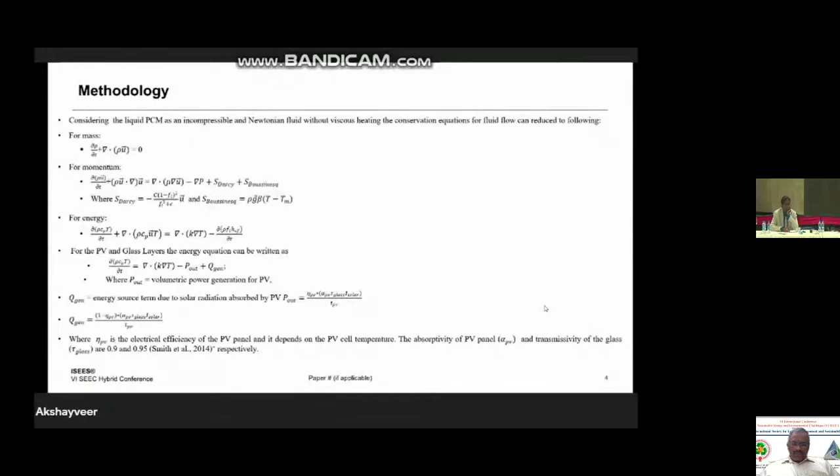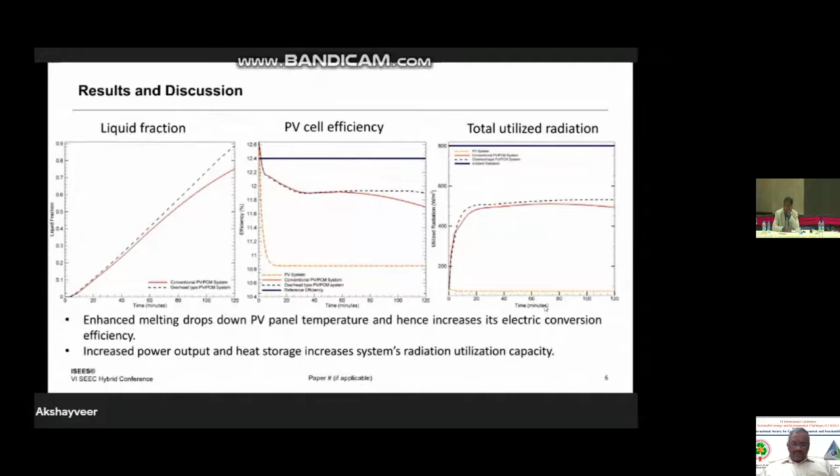So we come to the conclusion that our PV panel in the modified system works at 96% of its rated performance, whereas in the conventional system it was 93% and 86% in the simple PV system. And heat storage capacity of our system also increased by 10% compared to the conventional system.

So it generates more electric power and stores more heat, so it is a more efficient system and a cleaner source of energy. It can be a viable option to reduce carbon emissions and lead to a pollution-free and clean environment. So we can move inches closer to cleaner options of energy, and the modified system can be a good replacement for that.

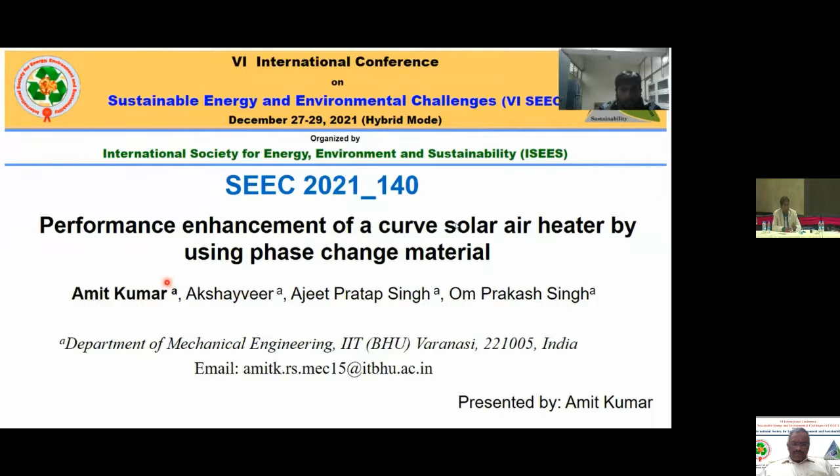Hello everyone, my name is Amit Kumar and I am a scholar in the Department of Mechanical Engineering, IIT BHU Varanasi. The topic of my presentation is performance enhancement of solar air heater by using phase change material.

Solar air heater has certain disadvantages. It has low thermal efficiency, higher hydraulic losses, and is not stable at night due to unavailable solar energy. The performance of the solar air heater can be enhanced by using phase change material. This is because such material absorbs and releases the energy during sunshine or off-sunshine hours in the form of latent heat. It increases the operational time and reduces losses.

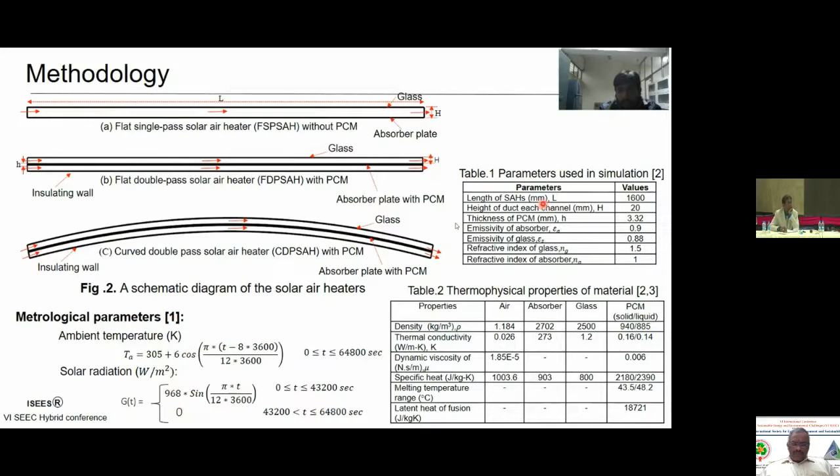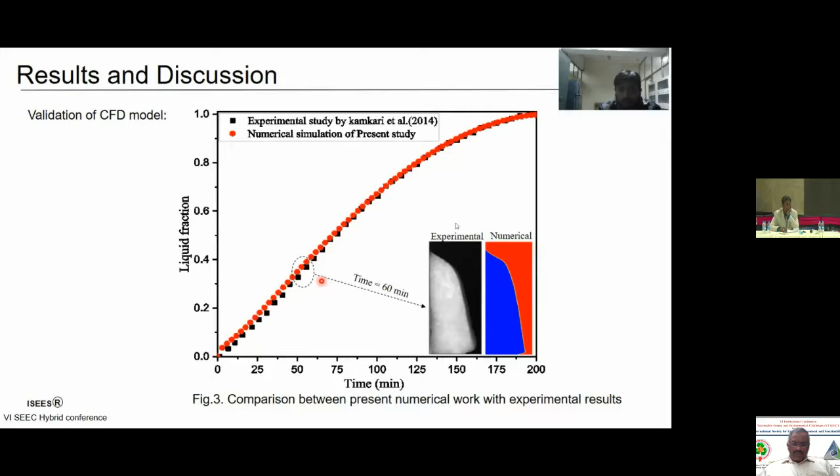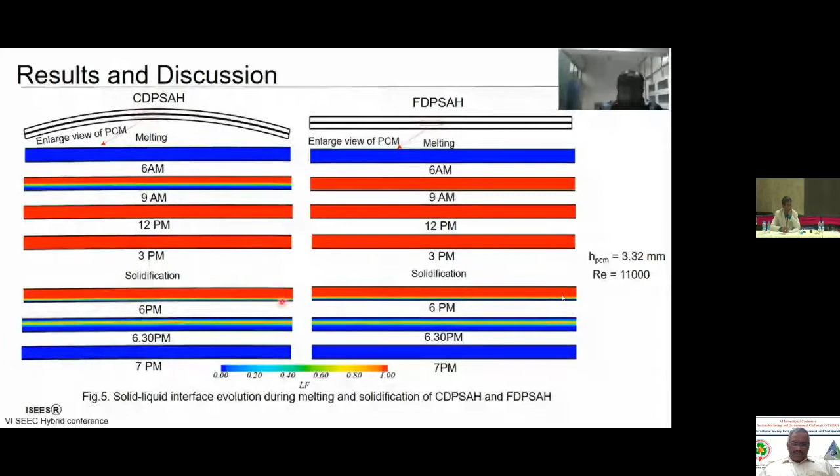Figure 5 shows the solid liquid interface evolution during melting and solidification of curved double pass solar air heater and flat double pass solar air heater. From this figure, a higher melting rate is found in the flat double pass solar air heater as compared to the curved double pass solar air heater. This is because due to centrifugal force, secondary vortices form near the absorber which take the maximum amount of heat from the absorber, so the melting is delayed in the curved double pass solar air heater. However, the solidification process is the same in both types.